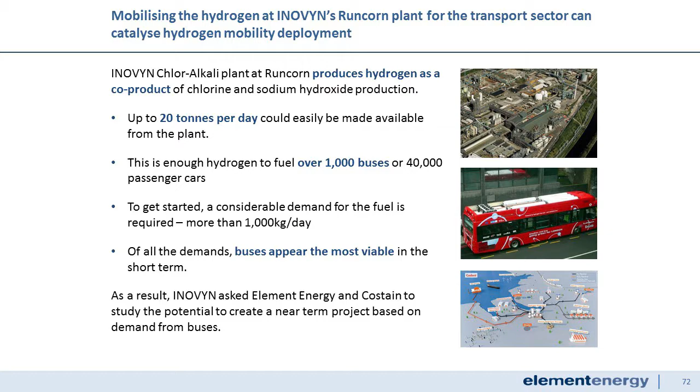20 tons of hydrogen corresponds to a fleet of about 1,000 buses, in fact more than 1,000 buses, and potentially around about 40,000 cars. But the challenge is, for a big industrial site like that, to get going on this and all of the costs of permissions and the infrastructure that's required at that site, you need a minimum scale to get started.

And when you look around the range of hydrogen mobility options that there are, the one that springs out as the most easily deployable and commercially ready is the hydrogen bus. That's not to say that the others don't have lots of merit as and when they become available, but right now the hydrogen bus is the one that seems to make the most sense.

And as a consequence of that, Inovyn pulled together this team of ourselves and Costain to study the feasibility of really creating a demand of a sufficient scale to get hydrogen flowing from the Inovyn plant.

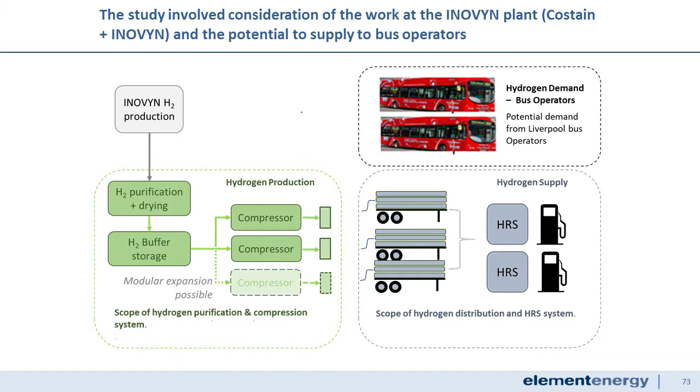And I guess the study, the work, has three main components. There's the work here, which is the work that needs to be done on the Inovyn site. And there's quite a lot to do at the plant to get the hydrogen flowing in the right way, and then to clean the hydrogen and to compress the hydrogen.

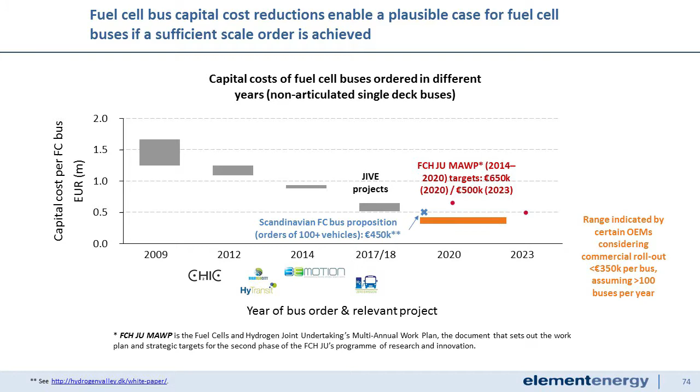But more interesting than that is that bus manufacturers are telling us that if we can get to demands of only 100 buses per year, 150 buses per year, they're in a position to make a further cost reduction to bring the price down, and this is actually a chart in euros, below 350,000 euros.

And given that a battery electric bus costs that, and in many cases more than that, that step basically moves us into a world where we compete commercially for zero emission routes. Which is a very exciting moment for the hydrogen sector. You can actually make a commercial proposition as opposed to effectively a subsidised proposition.

And perhaps even more exciting than that, we see 2 of the UK's leading bus builders, in fact the 2 leading bus builders in the UK, with active fuel cell development programs. So Wrightbus announced as part of a partnership at the start of this week that they're planning to deploy 600 buses by 2023 across Europe.

And that they'll do that at a price of at or below 375,000 euros. That they're in a position to do that at a price at or below 375,000 euros. A major step forward for the sector.

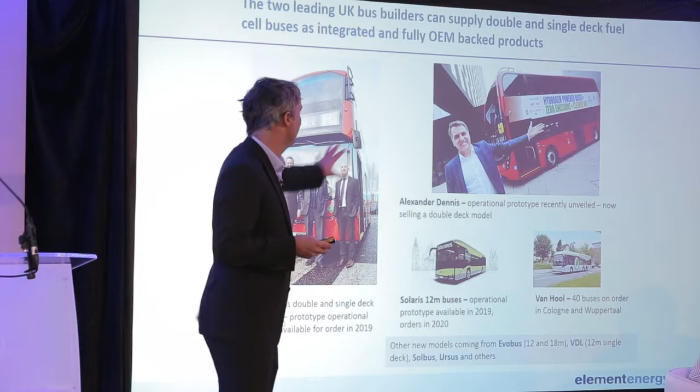And then also we can see outside the fantastic work that Alexander Dennis and Arcola have done together in launching their bus. We obviously just heard about the 25 bus deployment that's already planned. And of course, Arcola are also setting up production facilities in the region. So 2 great options for the region in terms of the buses.

And then actually, when we look across Europe, we're tracking about 14 bus OEMs with programs to develop fuel cell buses. So it's not as if the UK is alone. There will also be other European options.

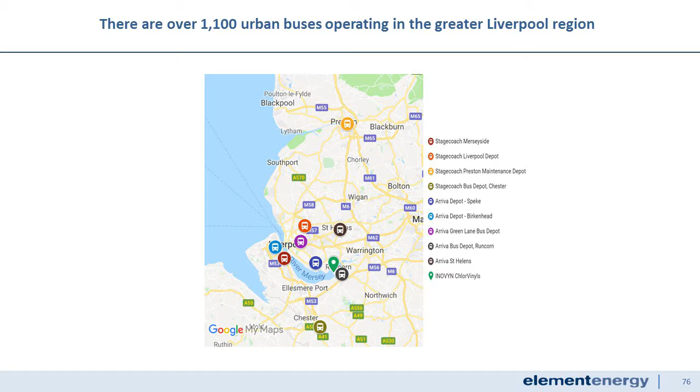This is a map of the different bus depots in and around the Liverpool city region, the greater Liverpool region. You can see that the Inovyn plant, this green dot, is right in the middle of it, which means there are plenty of bus depots within easy access.

Bus statistics are really hard to gather, but it looks like there's roughly 1,100 buses operating out of those depots. What that means is that the amount of hydrogen available at the Inovyn plant is pretty much equivalent to the amount that would be consumed if the entire fleet was converted to hydrogen, which is a very useful way to get the hydrogen sector started in the area.

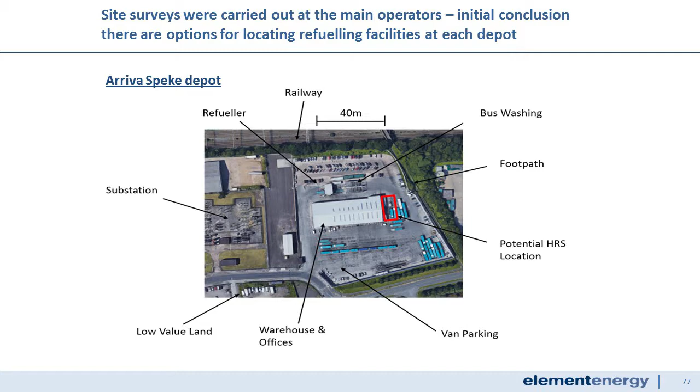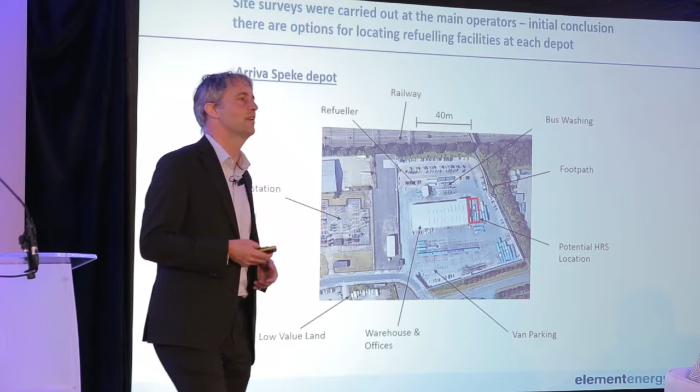As part of the project, we've had discussions with both Arriva and Stagecoach, the two main bus operators in the region, and visited their sites. In short, there's no practical reason why you couldn't put a hydrogen fueling station in and also convert the maintenance facilities to operate on hydrogen. So there's nothing to stop a major program at these early depots moving to hydrogen.

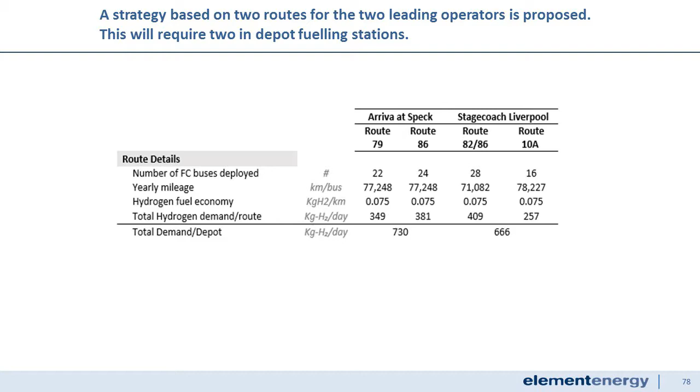We've also looked at routes and where you'd operate the vehicles. The big advantage of hydrogen for buses is that they can do difficult, long-duration routes into and out of city centres. So at both depots, the strategy is to pick two routes, probably one year after the other, operating from those depots into the city centres.

That leads to a bus demand of about 90 buses and creates a hydrogen demand of about 1,300 kilos a day. So the idea is to call that the start of the project, a way of initiating this at a sufficient scale, and then beyond that there's scope to expand to the greater fleet.

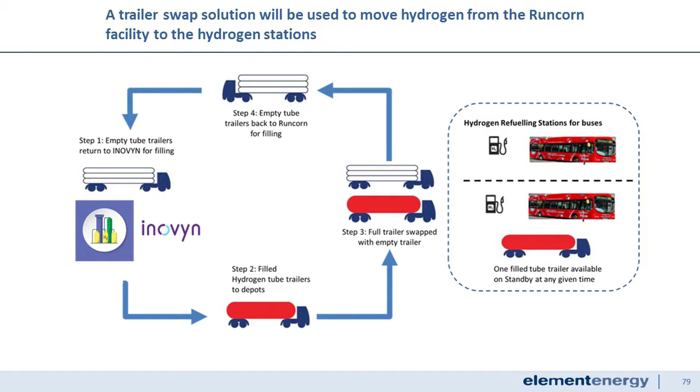The way we would move the hydrogen is via tube trailer. The strategy we worked up in the feasibility study, that others could also explore, is called a trailer swap strategy. That involves filling the trailer at the Inovyn plant, moving it to the hydrogen refueling station, and returning with empty trailers as and when the hydrogen is used.

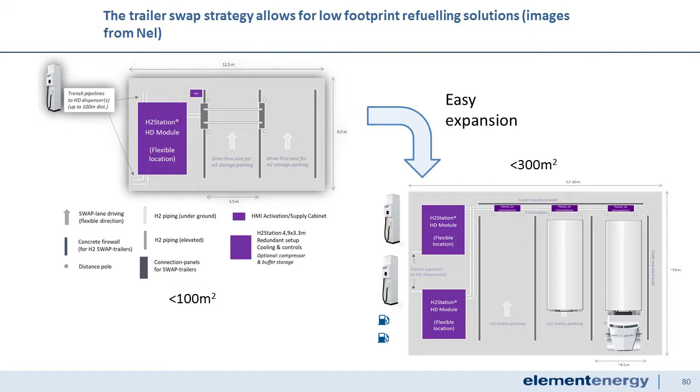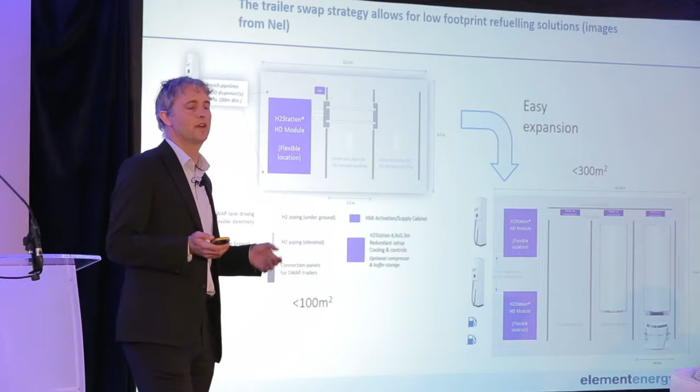The big advantage of that strategy is that you've effectively put the storage on wheels, minimising the footprint of the plant. This is an example designed from a company called Nel, who have shown how you can fill a fleet of roughly 50 buses on a footprint of 100 square metres, easily expanded by adding additional tube trailer bays to cover 150-200 buses in under 300 square metres — perfectly compatible with the areas available in bus depots.

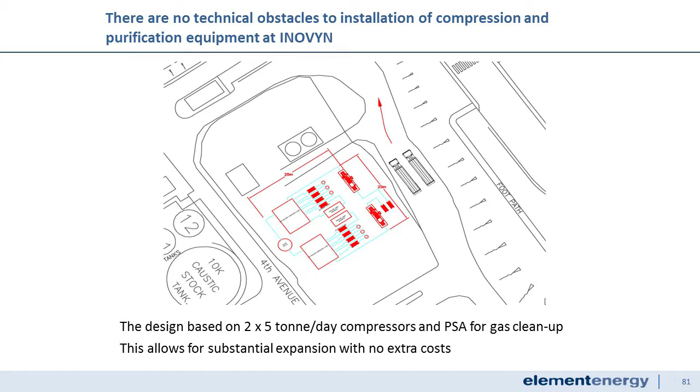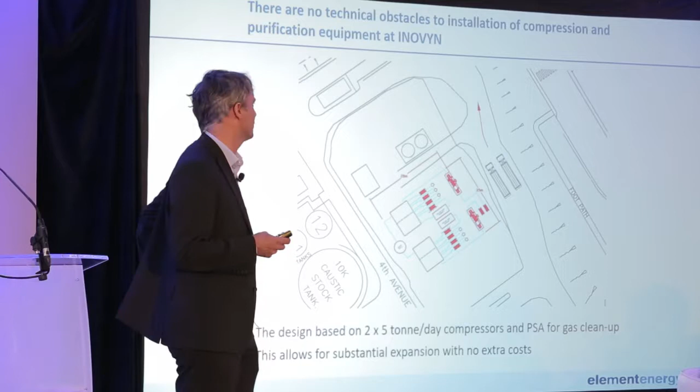At the production site, Costain have done a lot of work with Inovyn engineers to devise a solution. The current proposal is a 2 times 5 tonne a day compression facility with PSAs to do the hydrogen clean-up. The observant amongst you will notice that's considerably more than the amount of hydrogen that will be used for the buses, so getting this project off the ground means there'll be enough capacity for ready and very rapid expansion of demand for the region.

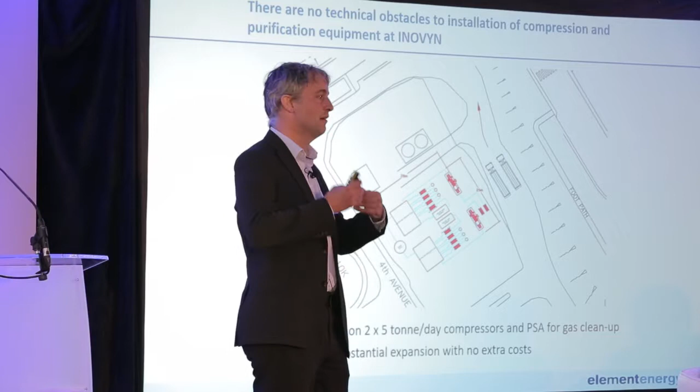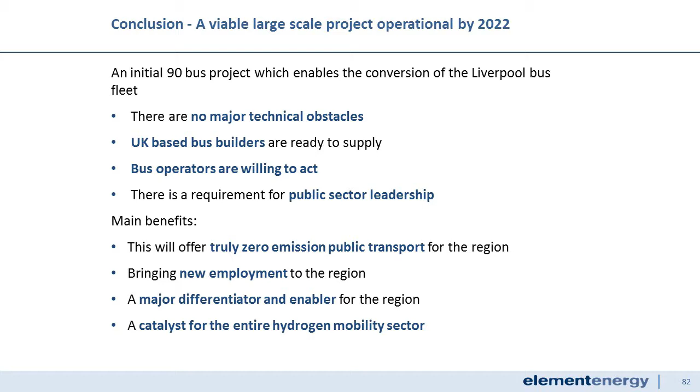So, final slide, just quickly concluding: we've done a study of a 90-bus project and concluded there are no technical showstoppers. As Frank said, every single bit of this has been done before. What hasn't been done is having it put together, and it hasn't been done at this kind of scale.

We've also got UK-based bus builders who are ready to supply and compete for the supply to the project. The bus operators are willing to act, provided the state is able to step in and help them bridge the gap from operating a diesel bus to a zero-emission bus. There is a requirement for the public sector to lead.

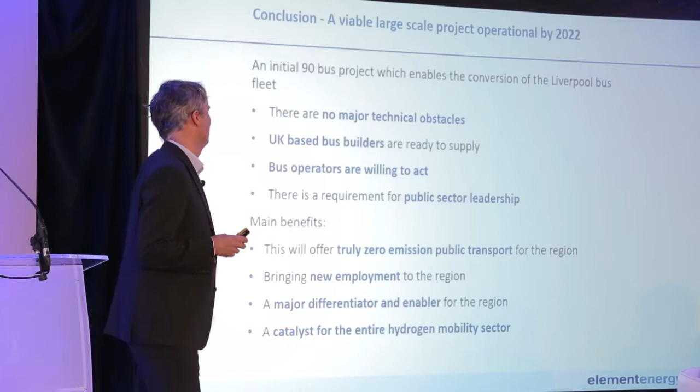There's also a requirement for the public sector to help catalyse deployment of the infrastructure and production equipment. I think there's an interesting trade-off between the amount of money that needs to be spent on that infrastructure and the willingness of the public sector to lead. If, for example, it was possible to make a cast iron commitment to deploy 1,000 buses by 2030, it would be a lot easier for the private sector to make those initial investments.

So the benefits of making this investment are fairly straightforward. It's directly a completely zero carbon and zero emission solution, and will bring immediate direct employment benefits to the region. There are then indirect employment benefits as a result of being first to do this at scale, and I think the final point is that it's a major differentiator for the region.

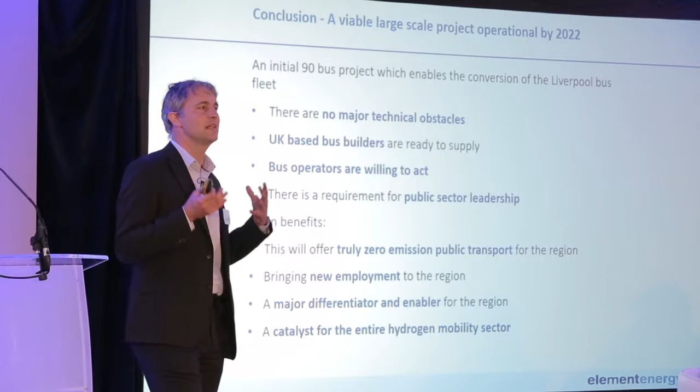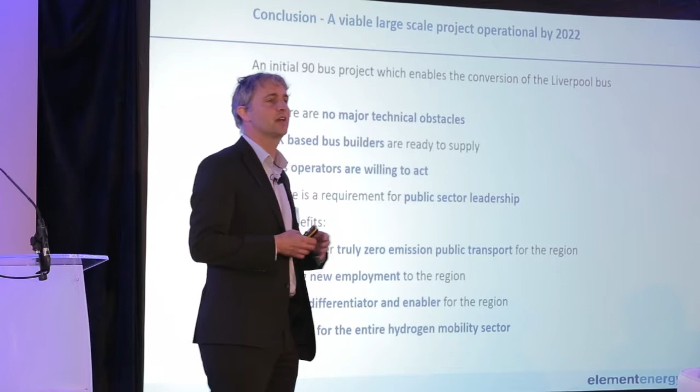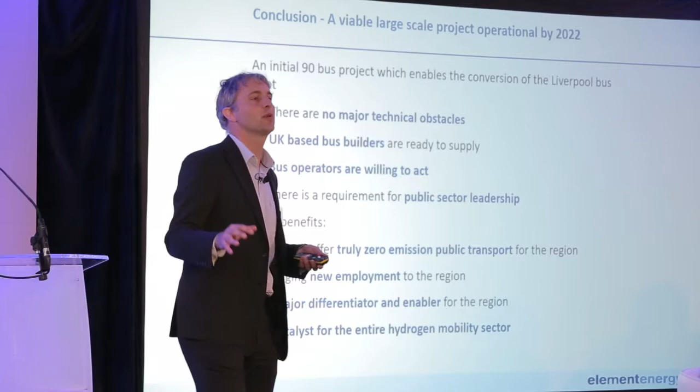As a result of unlocking this flow of hydrogen, the cost of hydrogen in the region will be significantly lower than anywhere else in the country. And what that will do is attract other mobility actors and other actors in other energy sectors to come to the region, and will really help prepare the region for subsequent deployments from projects of an even larger scale, like the HyNet project.